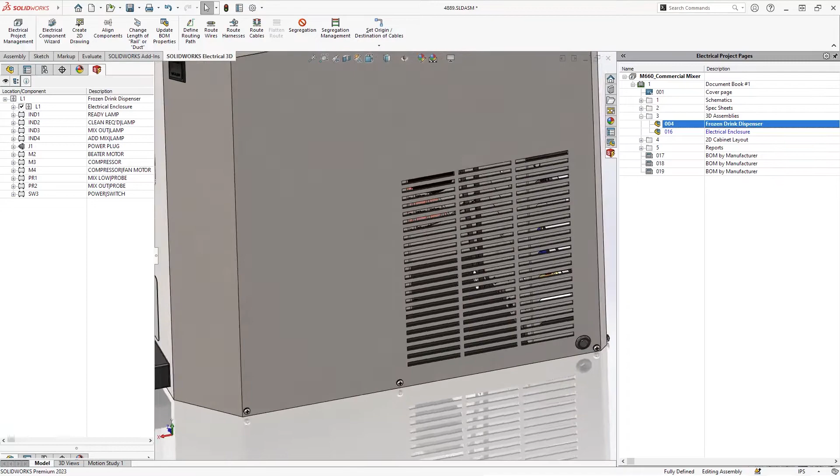SOLIDWORKS Electrical 2023 introduces new features so you can more accurately design and document your wiring, cabling, and harnessing projects. In this frozen beverage machine, we need to complete the power and switch circuit for a new mixing motor. Then, route everything and generate final PDF reports.

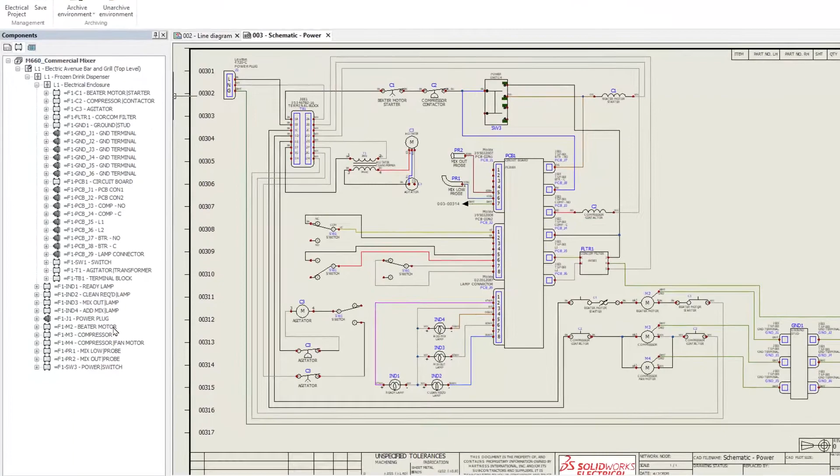A single component like this motor can exist in multiple single-line and multi-line schematics, as well as in 3D models. In 2023, deleting components is enabled, giving you a report of the impact and the option to remove the component from all drawings and 3D associations in one click. Let's make some room for a new motor.

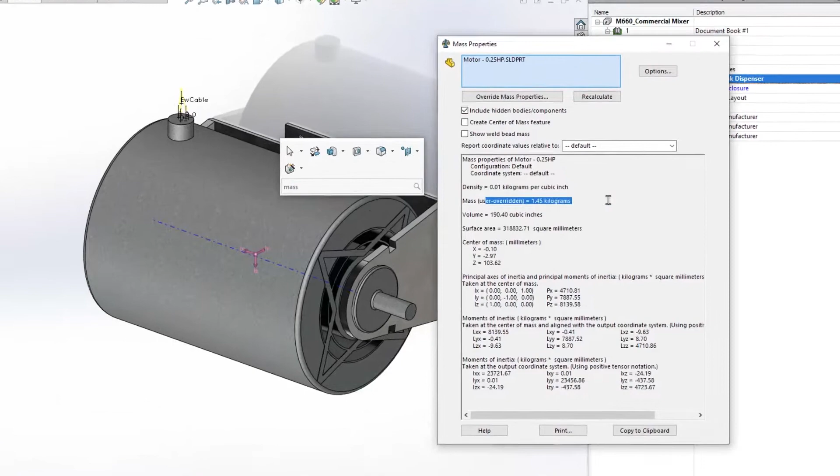Valuable information is stored in this manufacturer part, which can also be valuable in 3D. In 2023, all component properties will propagate to the associated 3D model. Properties like power and speed will definitely be useful on the mechanical drawing. And custom property compatibility now extends to weight, which will override the mass properties in 3D. This gives you more accurate ability to measure weight and balance.

You can also create on-the-fly dynamic connection labels, which are based on configurations and provide just the information and number of rows needed. Since some customers hardwire the frozen drink machine, we stopped including the power plug, instead providing a length of pigtail. In 2023, you can define open-ended wires for routes, capturing situations like these where the bare wire is still important to document.

The project deliverables include a complete wire list with lengths. This is where Electrical 3D is invaluable. In 2023, new Quick Filter buttons let you fly through the Electrical Manager tree. One click to expand and see all components. Another to hide or show what's already associated, in this assembly or others.

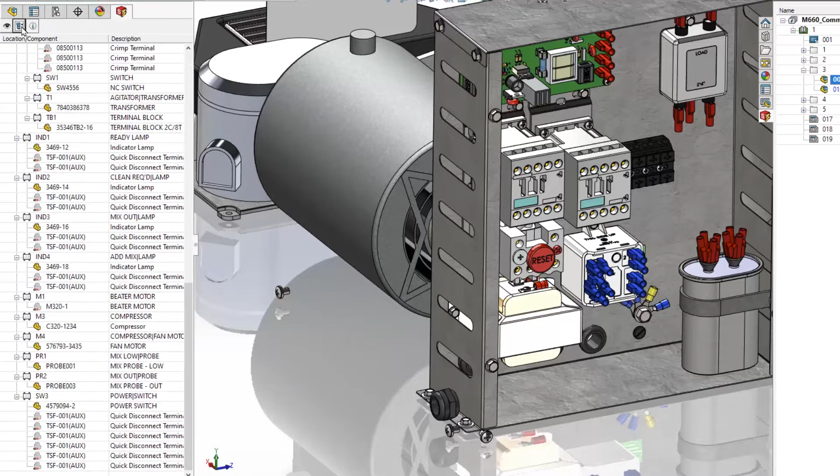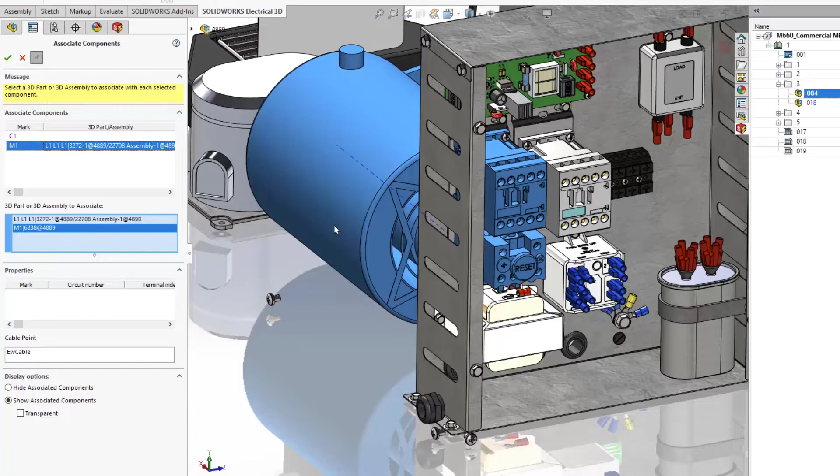With new component icons, you can instantly differentiate the electrical association and 3D model states. For example, if it's associated to a part or assembly, if it's associated in another assembly, if it's hidden or suppressed. In 2023, you can now associate multiple components in one command. The new Associate interface is redesigned for enhanced usability, which means much fewer clicks to define your components in 3D and start routing.

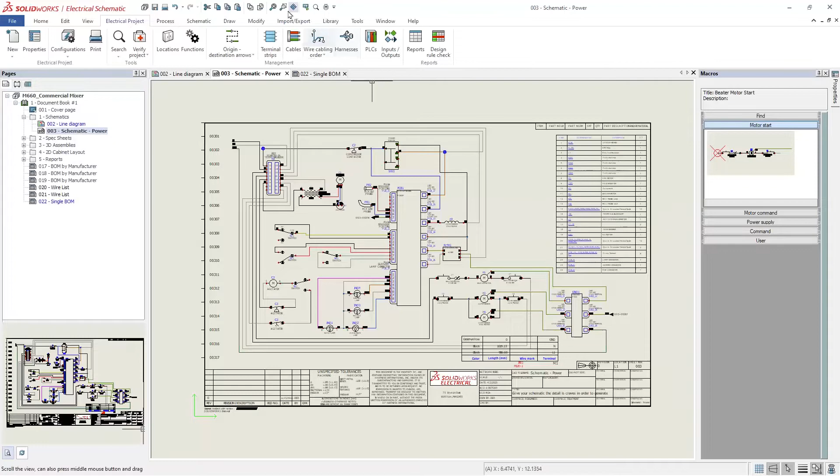In many jobs, the project reports become the final deliverable. Tables like wire list and manufacturer bill of material can easily be generated, and now in 2023, they can be copy-pasted and stay associative. In this case, a bill of material can be added to this one-sheet drawing, and manually updating is a task of the past.

Electrical 2023 includes support for inserting a wide variety of newer image formats. For example, PNG, JPEG, and TIFF are now supported. This eliminates the need to first convert an image to bitmap.

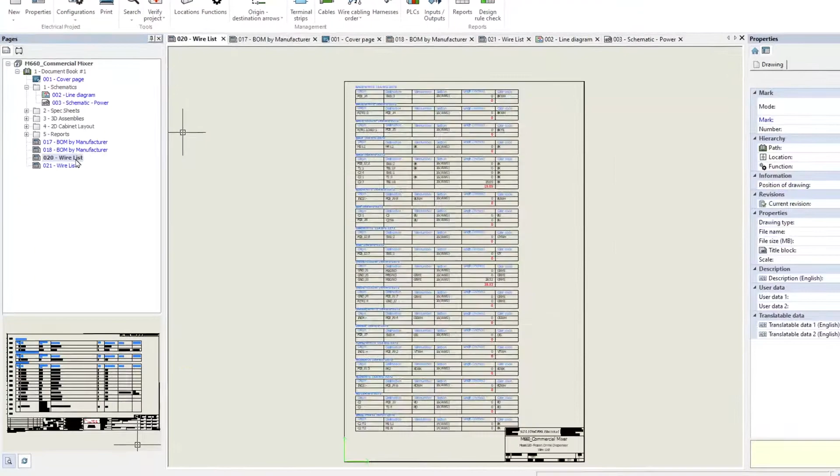With the project complete, many times you want to print everything to a PDF file. Frequently, reports are a mixture of landscape and portrait sheet orientations, like this one. The new automatic orientation option is a time saver when you want your PDF to be generated as you intended.

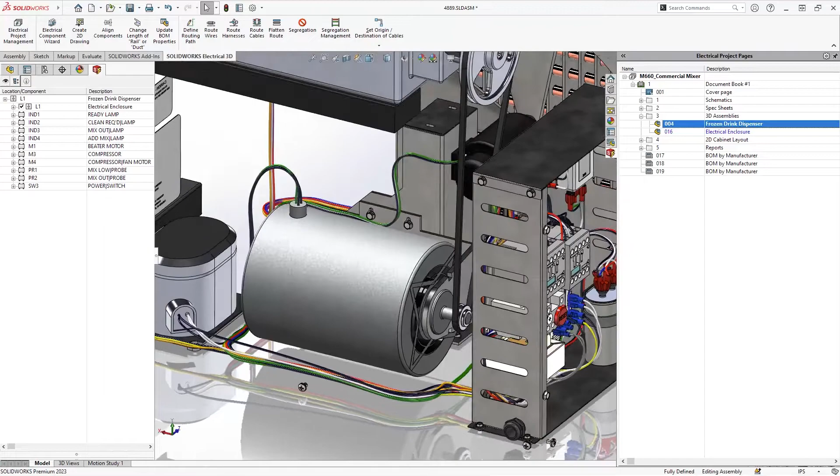SOLIDWORKS Electrical 2023 brings you expanded capabilities to manage components and share information between 2D and 3D, along with more flexibility in documenting your schematics. These are just some of the enhancements for you to discover in 2023.